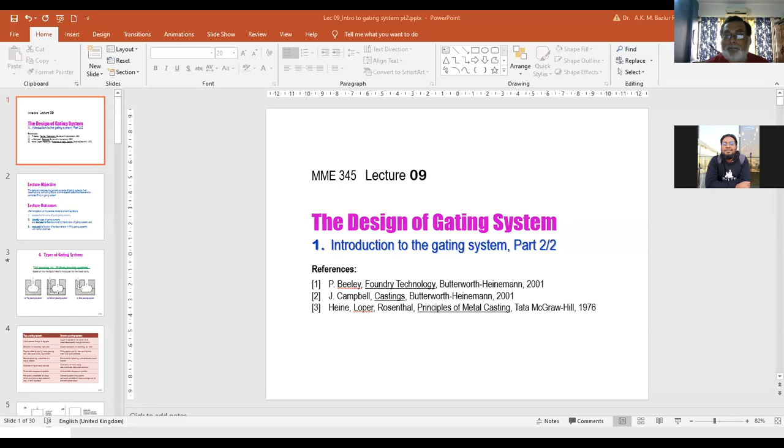Okay, we are continuing our pursuit to design of gating system. Last class, we introduced the gating system - what is it, how it works, what are the common features of the gating system, and what are the components of the gating system. In this class, we will end our introduction about the gating system. Here we'll talk about identifying different types of gating systems, and we'll analyze the factors controlling the function of the gating systems. So when you design a gating system, what are the aspects that we keep in mind during the design? And one special topic is for narrow channels.

If the casting section thickness is very thin, then one important element is surface tension, which comes into effect and controls the flow of the liquid metal. So how we deal with this narrow section casting during design of a gating system - that is our last aspect of today's class.

So let's talk about types of gating systems. In general, there are two different types of gating system. One is called top pouring and one is called bottom pouring. We are keeping in mind that it is solely based on how the liquid metal is introduced into the mold cavity.

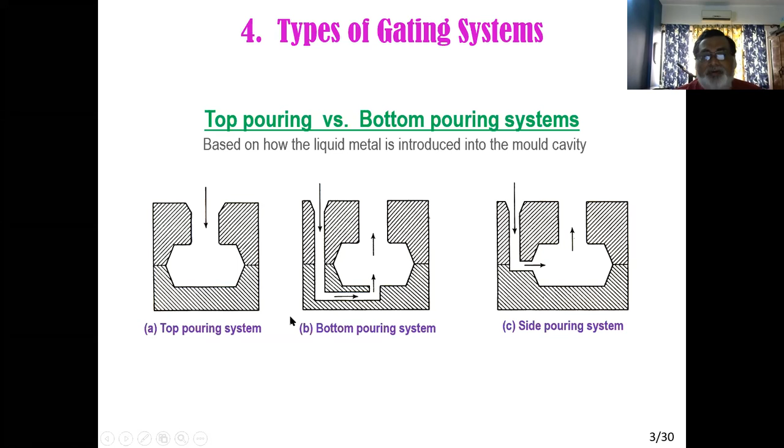On the other hand, if you have to design a bottom gating system, there is a lot of complexity, which we'll see later. So design of bottom gating system is a bit critical, and yield percentage is low. Pouring is aided by gravity, so faster pouring rate and less liquid fluidity requirement. We should mention this point because if you see the textbooks we are following, for example Heine's book, Beeley's books - all those books were written in the 70s, or even the 50s, 60s.

In that period of time, the only two metals commonly used were steels and cast irons. These types of alloys have low fluidity. So one purpose of casting was how quickly we can fill the mold cavity. Fluidity is an issue because steel solidifies very rapidly.

As a result, top pouring is always preferred, and all the gating systems used in textbooks show the top pouring system. On the other hand, in the bottom pouring system, filling is against gravity, so pouring is slow, and more fluid liquid is preferred because velocity is decreasing, so more time is needed to fill the mold cavity. So you need higher fluidity of the liquid metal.

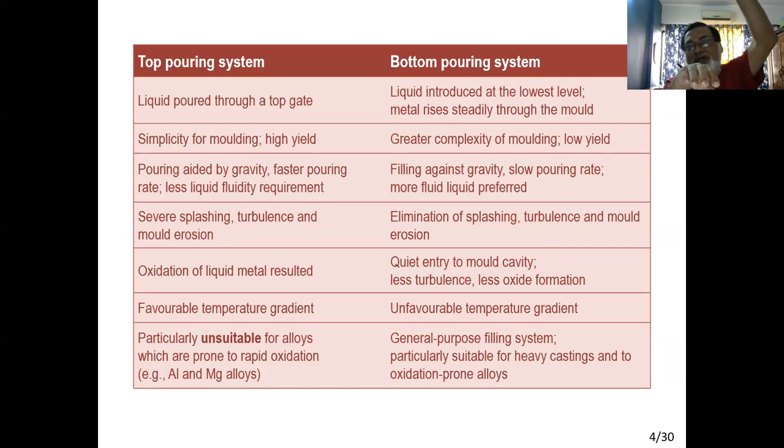On the other hand, if we pour from the bottom, the first liquid goes up and the last liquid stays at the bottom. So the last liquid is hotter but has less density, and the first liquid is colder with higher density. So the temperature gradient is not favorable this way - hotter liquid should be on top, colder liquid should be at the bottom.

So there is a motion of the liquid called convection, and because of this motion, certain things can happen - defects can generate, defects can mix up, oxide can flow and move, etc. So this results in an unfavorable temperature gradient in terms of solidification, and in terms of oxide or other defect movement.

This is particularly unsuitable for oxidation-prone alloys, for example aluminum alloy or magnesium alloy. If you cast using a top gating system for this type of alloy, turbulence will damage your casting. On the other hand, we prefer bottom pouring - we will advocate this type of pouring system in our design purpose. This is a general purpose filling system, and it is particularly suitable for oxidation-prone alloys. Aluminum and magnesium are excellent for the bottom pouring system, and it's also particularly suitable for heavy castings.

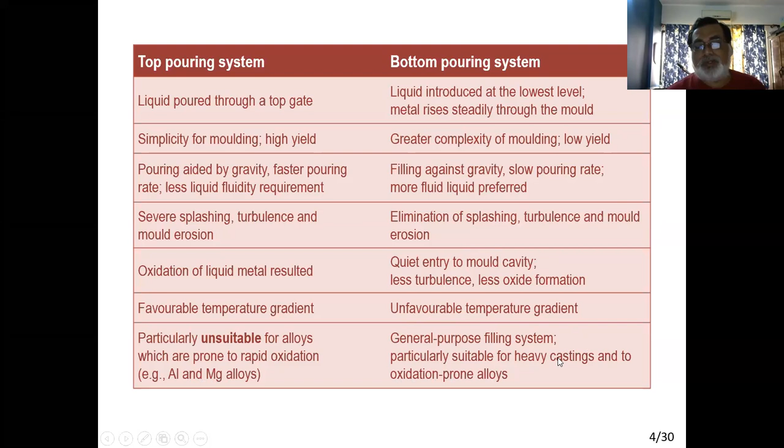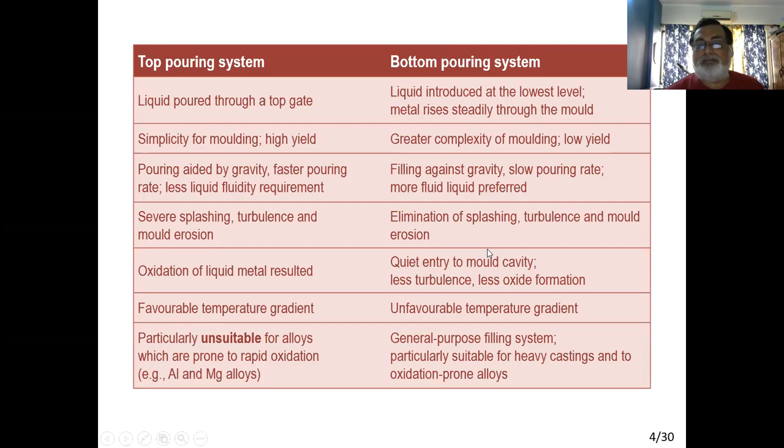Since heavy castings require more time to start solidification, during this time the unfavorable temperature gradient can be minimized. Because of convection, colder liquid can go down and hotter liquid can go up, and solidification doesn't start yet. So for heavy castings, this system is good for producing better quality casting.

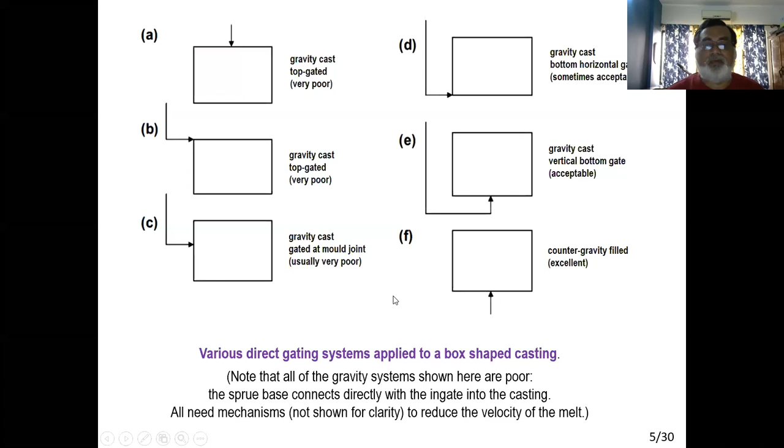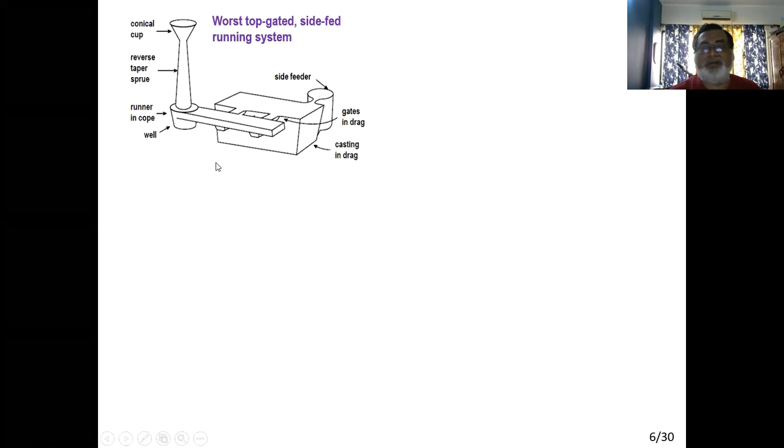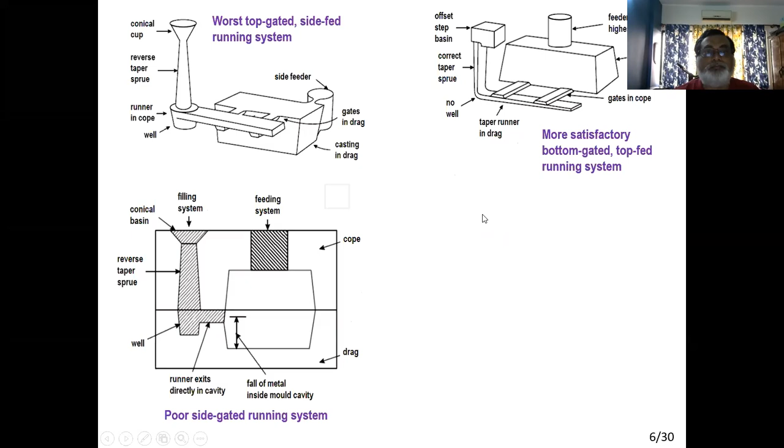This is a version of the bottom pouring systems where the channels are even more narrow. So instead of this one, here is a very narrow sprue. It could be rectangular or circular as well. And the runner is very slim, very thin, and the gates are also a small section.

As a result, the liquid metal requirement in the gating system is much less, so percent yield is increased. Ultimately, because of the constriction or narrowness of the channel, the liquid metal has very small opportunity for turbulence or splashing, because they simply don't have enough space to accommodate it. So this is one of the most effective gating systems, and we'll try to design these types of systems later on.

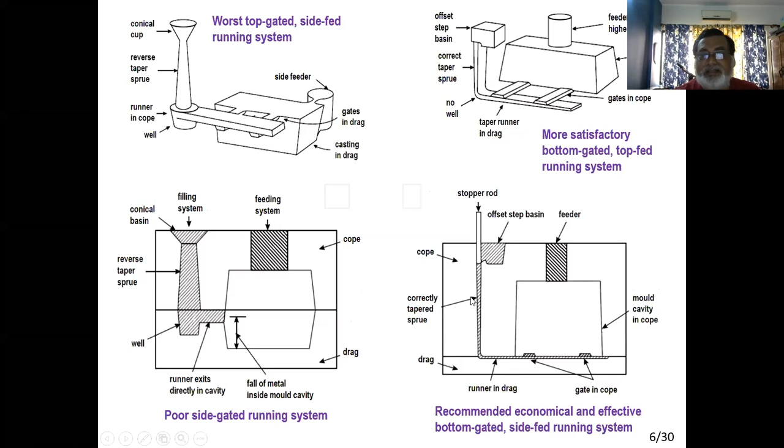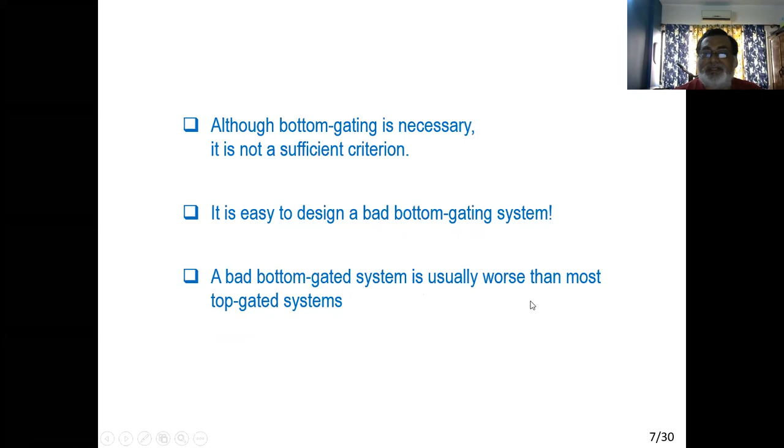So again, we are advocating bottom gating systems. Although the system is necessary, it is not a sufficient criteria, because designing a bottom system is very difficult. It is very easy to design a bad bottom gating system, and a bad bottom gating system is usually worse than most top gating systems. Let's see some examples.

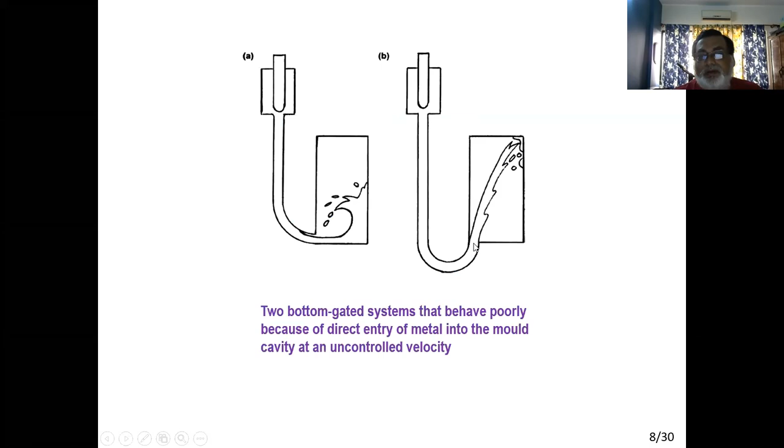This is a bottom gating system, but designed badly. Because of that, there is a lot of turbulence, a lot of splashing. The velocity of entry is very high. So although we are using a bottom pouring system, this is bad.

Similarly, this one is a bottom pouring system, but liquid metal enters the mold cavity directly. As a result, the velocity of the liquid metal after this high fall cannot be controlled. Liquid metal flows with very high velocity into the mold cavity, striking the opposite end of the mold cavity, damaging the other side, causing splashing and mold erosion. So although it is a bottom gating system, because of its design, it is very bad.

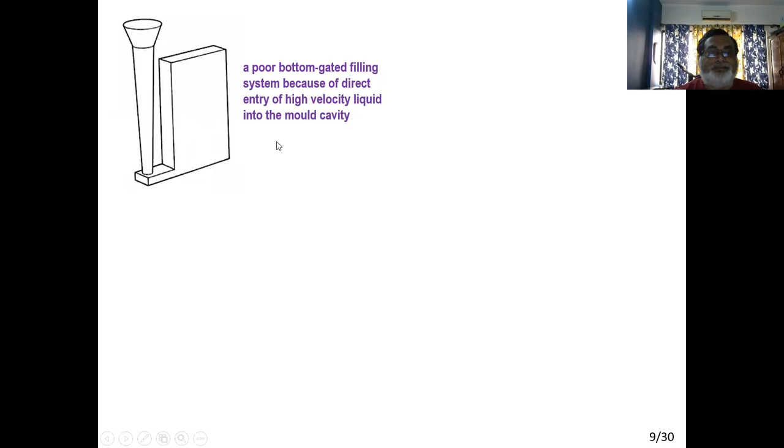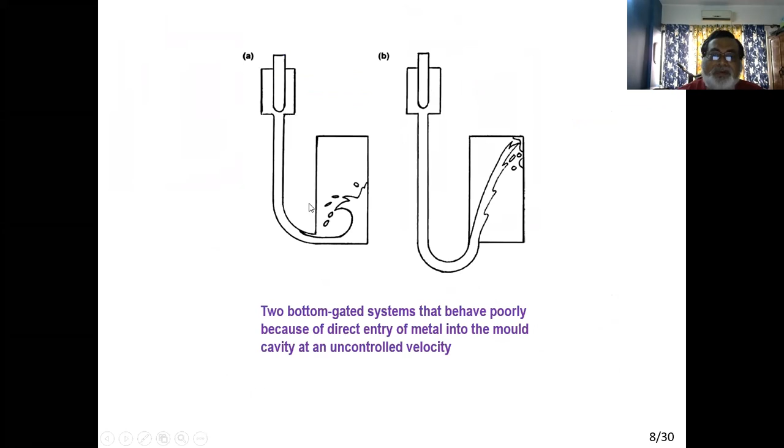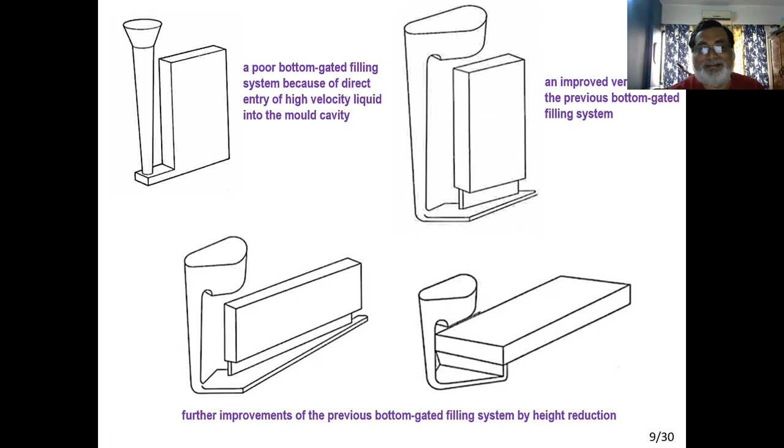Yes, sir, somewhat understood. Okay, we'll see later again there.

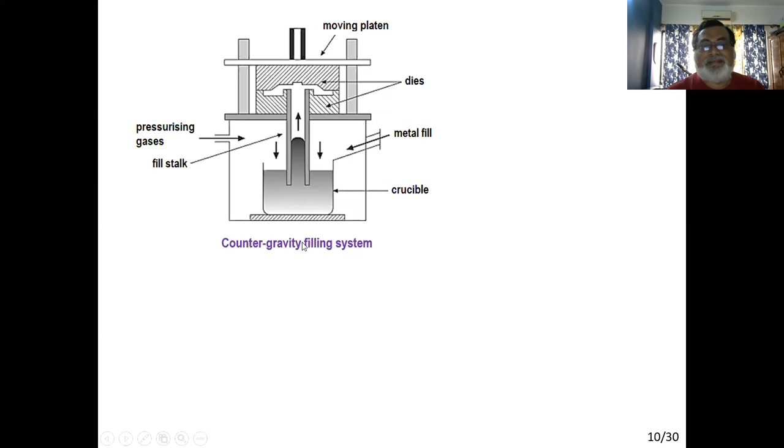Similar to this, there is another system, also a counter-gravity system, called the Cosworth process, invented by Professor Campbell. Here the furnace is open to the air. From the melting furnace, you pour the liquid metal into a chamber called the holding furnace, and there is an electromagnetic pump. Using this pump, you can flow the liquid metal through this channel or tube to the casting. Again, liquid metal is moving upwards under the action of the electromagnetic pump, so velocity is controlled, and liquid metal moves in a controlled way into the mold cavity. So again, there is no turbulence, and casting will be of supreme quality. This is called the counter gravity filling system. Obviously this is an expensive process, so if you need very good quality casting with defects minimized or even eliminated, you can use this type of casting. Obviously these castings are not suitable for general purpose castings because of their expense.

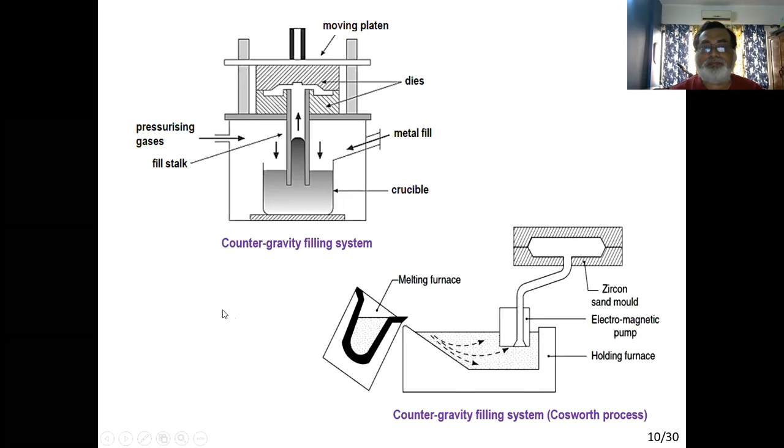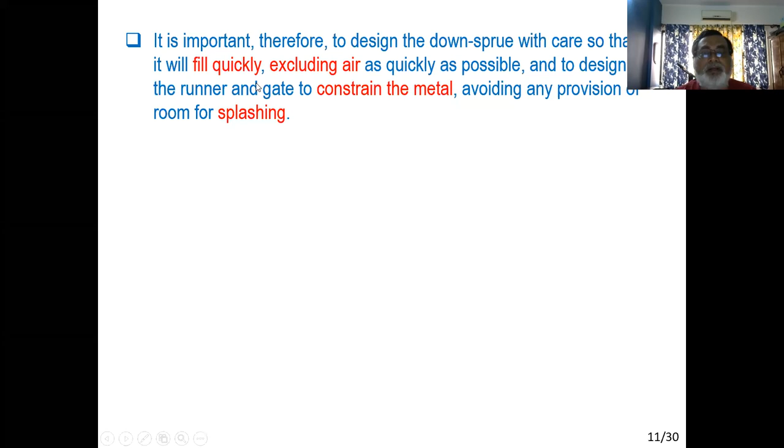So the purpose of the gating system is to have a sprue and fill the liquid metal through the sprue in such a way that it will be filled very quickly, so there will be no air, and so there will be no turbulence or gas entrapment. The sprue will be filled very quickly so that there is no air entry, and then we have a runner and gate. The liquid will be contained through this runner and gate, meaning there will be no chance of movement of the liquid metal through this narrow channel, so no splashing will be allowed. So we have a sprue whose purpose is to fill the liquid metal very quickly so there is no air inside the liquid. When the liquid metal enters the horizontal channel, which is the runner, it cannot move because of the narrowness of the runner and the gate. There will be no splashing, no turbulence, no vena contracta, so there will be no negative pressure zone that allows air to enter the mold cavity. That is the main aim of designing the gating system.

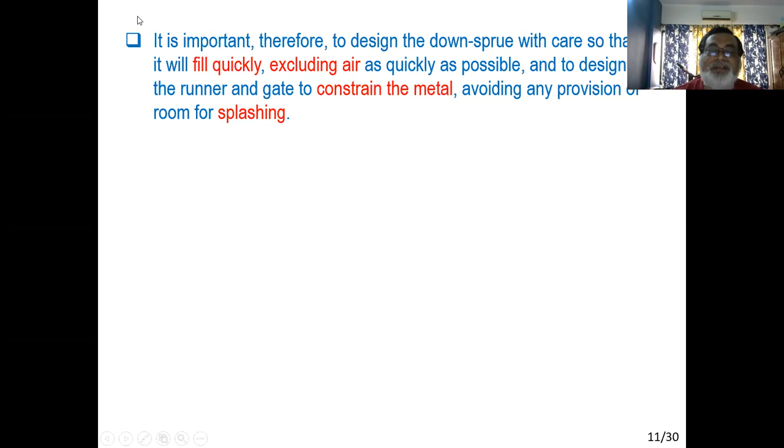As we prefer a bottom gated system, the base of the sprue should be the lowest point of the whole gating system. Once the sprue bottom is attained by the liquid metal, there is only a chance for liquid metal to go up, so liquid metal is always moving upwards. As a result, velocity is decreasing continuously, and liquid metal is moving in a controlled and progressive way.

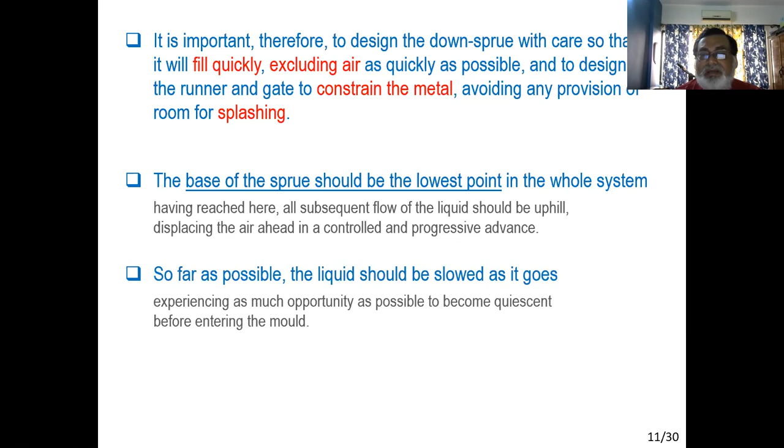So far as possible, the liquid should be slowed as it goes, so that velocity can be decreased and liquid metal enters the mold cavity in a quite calm manner. Our target is that the velocity of the liquid entering the mold cavity should be between 0.5 and 1 - this is the critical velocity. If we can maintain this velocity while the liquid metal enters the mold cavity, we are okay, and a good, reproducible casting will be generated.

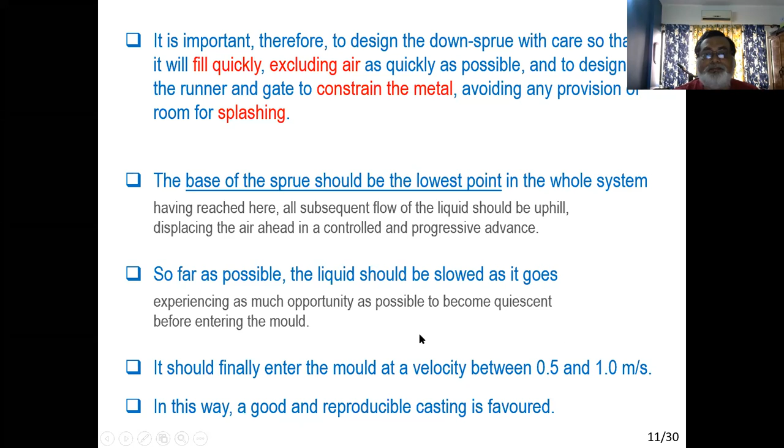So the top gating system and bottom gating system we concluded. Then there is another type of system called pressurized gating system and unpressurized gating system. What is a pressurized gating system? During this system, from the bottom of the sprue, liquid metal is moving and the channel of liquid movement is constricted gradually - the area of the channel is reduced, and because of that, the velocity of the liquid metal is continuously increased. At the same time, liquid metal is experiencing a certain back pressure.

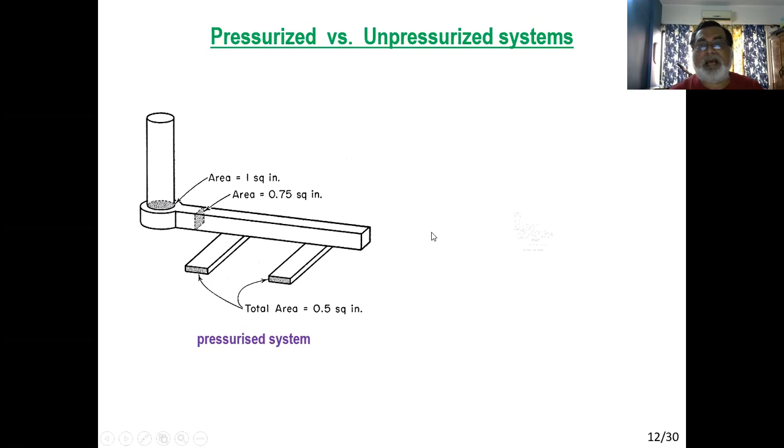In the unpressurized system, it's exactly the opposite. The bottom gate area, the sprue area, is the smallest area, and from there on, the area is expanding. As the area is expanding, the velocity is decreasing, and as the velocity decreases, the chance of turbulence is minimized. This is the sole purpose of this system - minimizing turbulence. Although there are a lot of disadvantages of this system, the purpose is to minimize turbulence.

But if we increase the area, there is no back pressure of the liquid. As a result, there is a chance of entering air into the running system because of not filling the running system completely by the liquid metal. So there will always be a chance for incomplete filling of the running system in this type of gating system.

So again, if we compare, in the pressurized system, the gate is used as a choke. What is a choke? Choke is the smallest area of the running system, and this is the point where the velocity of the liquid metal is calculated - this is the reference point. So the smallest area of the gating system is known as the choke.

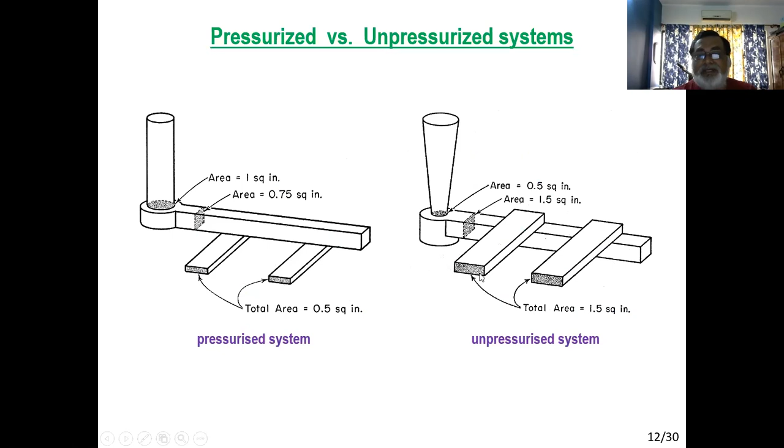Velocity in each multi-gate system is equal. So here we have used 2 gates and velocity in these 2 gates is equal. But here it is different, it will be different. And to maintain same velocity in these 2 gates, or if we use 3 or 4 gates, maintaining equal velocity in all gates is a challenge, and you need special measures to do that.

Volume of the gating system is smaller because we are decreasing the channel, so volume is smaller, so casting yield is very high. On the other hand, here we are expanding the gating system, so it has a chunky size, and yield of casting will always be lower. But because of the turbulence, we use this type of system in our design.

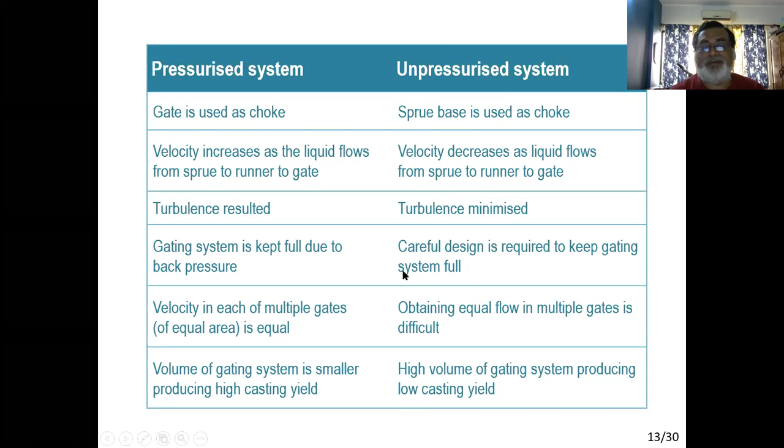Now we are saying a lot of bad things about pressurized systems. What are the bad things? Because turbulence is the main point. Nowadays, we see that most defects originate from turbulence, so we are very cautious about how to minimize the turbulence. And because of that, we say pressurized system is bad because turbulence is increased due to high velocity.

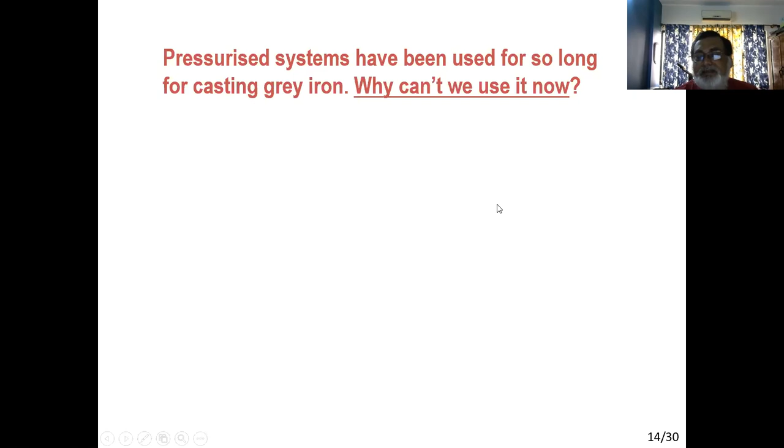But this pressurized system has been used for so long for casting gray iron or casting steel. Again, in our textbooks, these types of systems are used. So why can't we use it now? What are the problems of using this type of system nowadays?

Okay, first of all, this is because of the green sand system. In your lab classes, you use green sand system, that means sand-clay system. Bonding is done by the clay and water.

When you use cast iron, gray cast iron has a special relation with green sand. What is the relation? Oxidizing environment in green sand mold produces a liquid silicate film on the surface of the liquid iron, and this silicate film protects the liquid metal. And since it is liquid, there is no solid oxide film commonly found in aluminum or other alloys. Because of that, turbulence is not a problem for this type of system.

Gray iron with green sand system, turbulence is not much of a problem, and we tend to get good quality casting even when velocity is very high.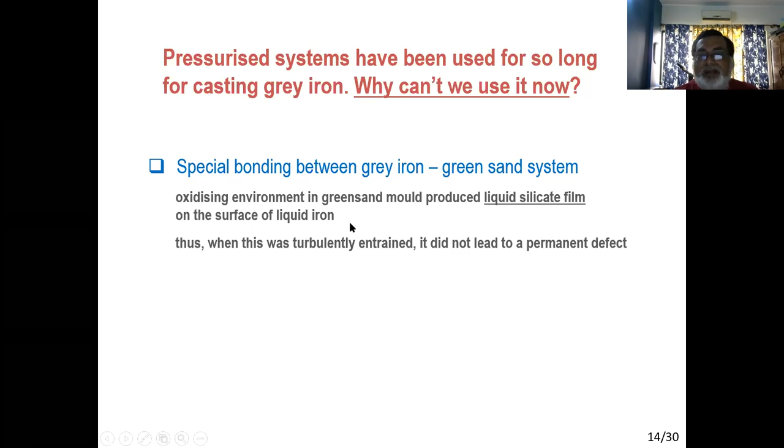But the problem is, nowadays we no longer use green sand system. To have quality casting, we use chemical binders and lots of mold additives. And these types of additives and chemical binders are not suitable, or are not doing much help that we usually found in the green sand system.

So sensitivity to turbulence is increased in this case. As a result, turbulence will give bad quality castings in these types of molds. Another thing is the use of oxidizing alloying elements such as magnesium or chromium, so turbulence is a bigger concern in this type of alloy.

Lastly, rise in the level of standards required of castings. Nowadays we have very restricted standards. Previously, for example, if a 1 millimeter size of defect was allowed, nowadays we cannot. Tolerated size of defects is reduced further, so nowadays, for example, we cannot tolerate more than 0.5 millimeter.

So because of the restriction in standards, we no longer accept such degree of turbulence in our casting. As a result, pressurized system is considered bad nowadays.

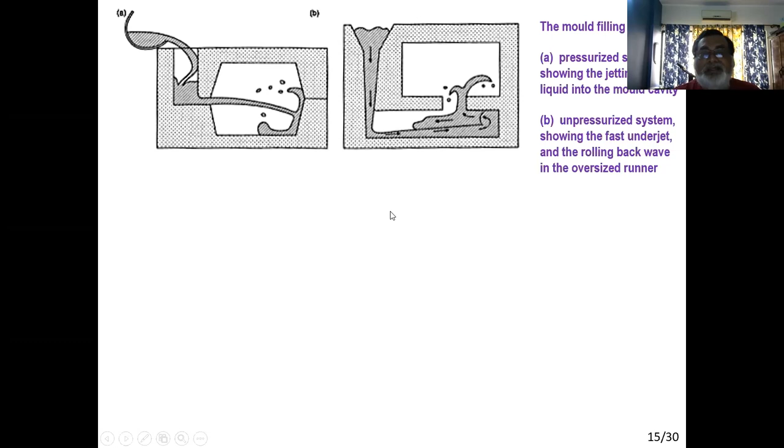There is another example.

So this is the sprue. It's a thin sprue base, and it is a runner. Liquid metal is flowing, hits the far end wall, rolls back, and then goes up into the mold cavity. There is a fountaining effect, not much, and then it rolls back again and starts filling the mold cavity.

So in design, even the bottom pouring system or unpressurized system, designing of the system is very critical. It will give you better quality casting, but designing is very crucial.

There is another process, naturally pressurized system. So we have pressurized system, we have unpressurized system, and then we have naturally pressurized system. Probably from next year I tend to advocate naturally pressurized system, but up to this year we have used unpressurized system. So what is a naturally pressurized system?

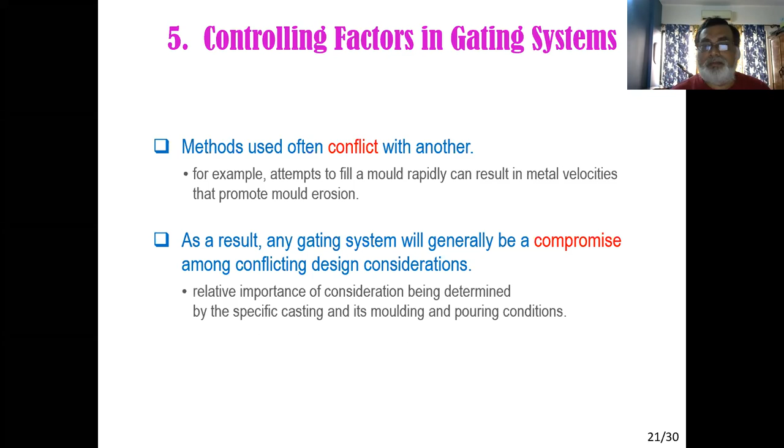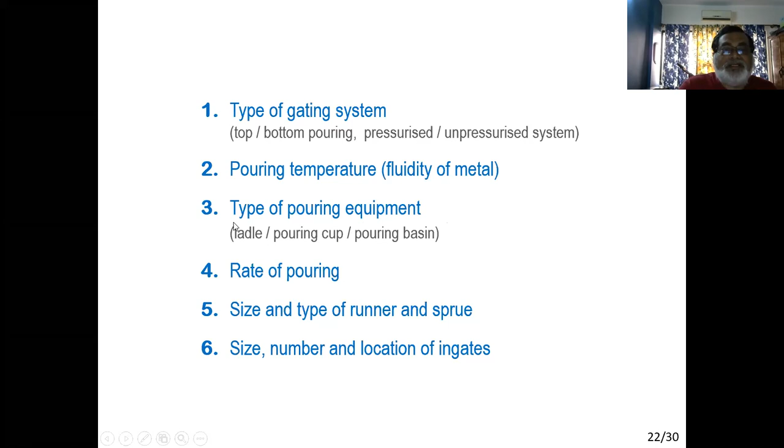Type of the pouring equipment, or at what point we are pouring the liquid metal and which equipment we are using, whether it is a ladle, or we are pouring directly from the ladle to the mold cavity, or we are using a pouring cup, conical pouring cup, or we are using a pouring basin. All these are different. We will see later.

The rate of pouring is also a critical factor because it will govern the velocity. Size and type of the runner - in fact, this will control the whole gating system. We will design the gating system based on a particular pouring rate. Size and type of the runner and sprue, size, number, and location of ingates. So while designing, we'll firstly consider this thing, then we'll design this one and these two based on this four.

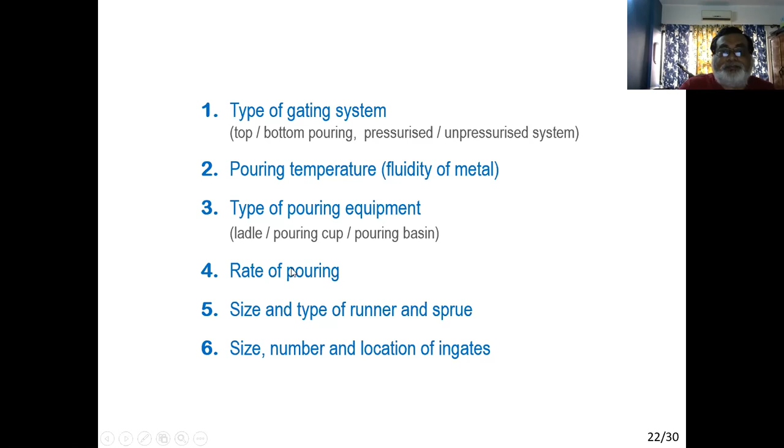Okay, let's have a 5 minute break. Any question on this so far we talked about?

Sir, I had a question. So in the X-ray image, when the bad design of the bottom pouring system led to the fountaining effect, you showed that there were cracks that showed up. So are those cracks solely created because of the oxide films, or are there any other reasons?

Okay, we are talking about this one. Yes, sir.

Later we'll see that most of the defects generated are because of this oxide film. And the defects usually are cracks, gas porosity, shrinkage cavity. So these are the common defects in a casting. And all defects can be initiated on top of an oxide film. So that's why turbulence is the critical issue here. If turbulence occurs, oxide can generate and enter into the liquid metal.

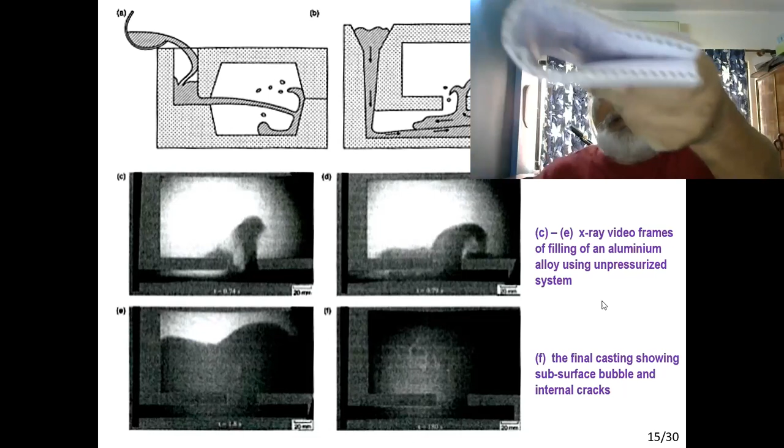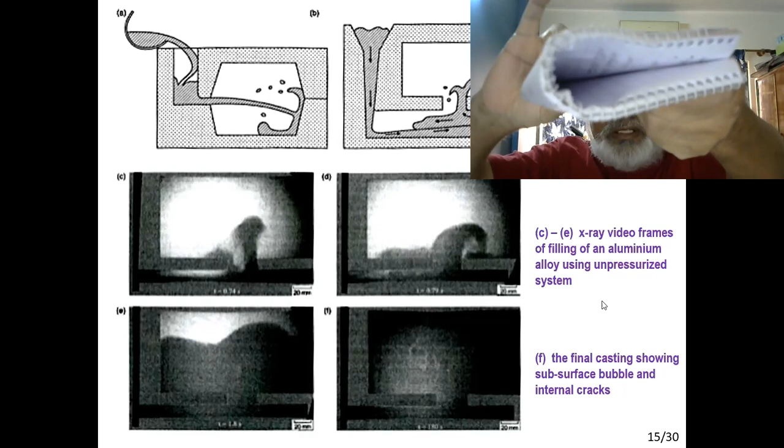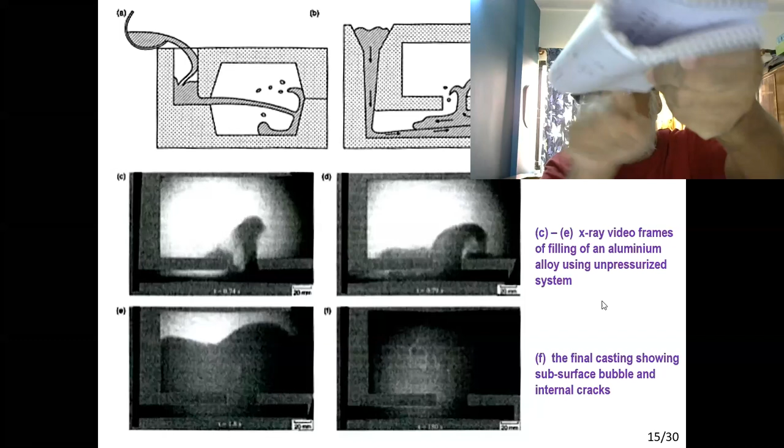যদি এরকম ফোল্ড হয়ে যায়, তার মানে উপরের পাশটাও অক্সাইড, পুরাটাই অক্সাইড। অক্সাইড ইজ নট ওয়েল্ডেবল, কারণ এর চারিদিকে লিকুইড মেটাল আছে, দে বন্ডেড ভেরি ইজিলি। এই পাশে বন্ড আছে, ওই পাশে বন্ড আছে, সবকিছু ঠিক আছে, কিন্তু মাঝখানে যে জায়গায় দুইটা অক্সাইড লেয়ার মিশলো, সেখানে কখনোই বন্ড ফর্ম করবে না, কারণ তারা ড্রাই। উপরের লিকুইডের সাথে বন্ড আছে, নিচের সারফেসেও বন্ড আছে, চারিদিকে বন্ড আছে, কিন্তু ভিতরে কোনো বন্ড নেই। as a result, this will act as a crack inside the liquid metal.

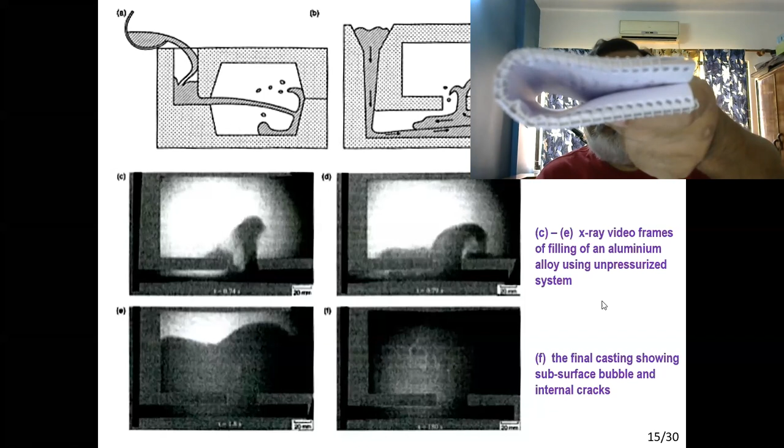So অক্সাইড যখন ফোল্ড হয়ে যায়, এই ফোল্ড জিনিসটাই একটা ক্র্যাক হিসেবে কাজ করে। জাস্ট ইমাজিন গ্রে কাস্ট আয়রন, তোমরা গ্রে কাস্ট আয়রনের ম্যাক্রো স্ট্রাকচার দেখেছো? Yes দেখেছি। গ্রাফাইট ফ্লেক্স, যেটা গ্রে কাস্ট আয়রনের মধ্যে থাকে, তাই না?

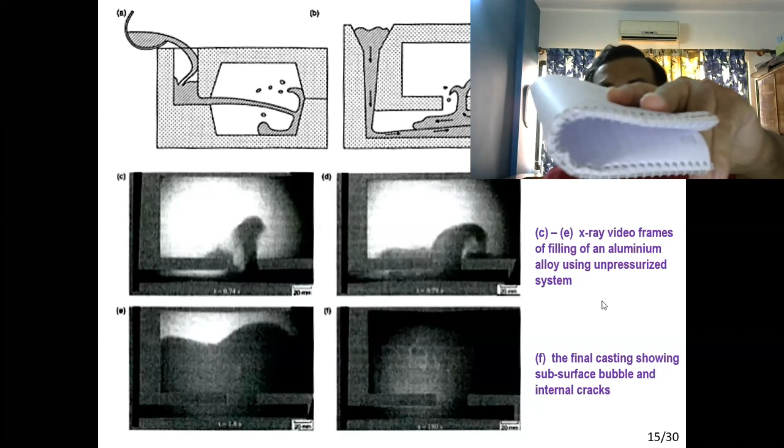গ্রাফাইট ফ্লেক্স থাকে, মানে এর ভিতরে পাউডার থাকে, এই পাউডার থাকার কারণে এর মধ্যে কোনো বন্ড নাই, যার কারণে সেটা ডিফেক্ট হিসেবে কাজ করে। এক্স্যাক্টলি সেম, এটাও একটা ডিফেক্ট হিসেবে কাজ করে, কারণ এখানে কোনো বন্ড নাই। সো ইট অ্যাক্ট অ্যাজ এ ক্র্যাক।

এর চারিদিকে ও উপরে আছে অক্সাইড, এবং এই অক্সাইড থাকার কারণে, আমরা সলিডিফিকেশন পড়ার সময় বলেছিলাম, অক্সাইড is responsible for nucleating gas porosity। So এখানে সে গ্যাস পরোসিটিও নিউক্লিয়েট করে।

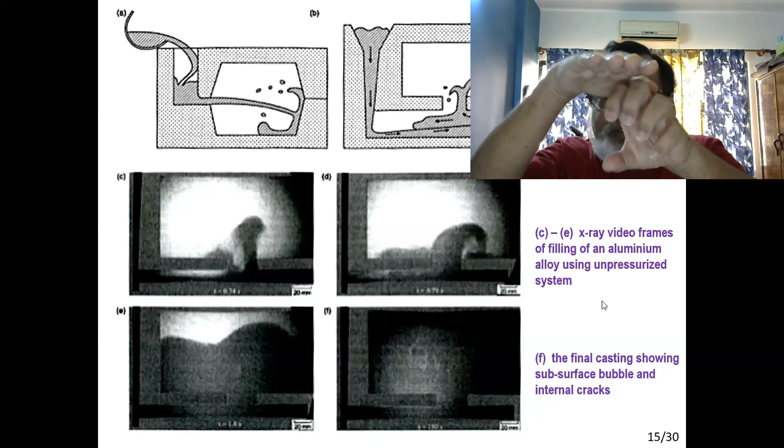আরেকটা ডিফেক্ট আছে, শ্রিঙ্কেজ ক্যাভিটি। যখন লিকুইড মেটাল পুরোপুরি ভরা থাকে, তখন এর ভিতরে ক্যাভিটি জেনারেট করে। কেন করে? কারণ এখানে একটা টেনশন কাজ করছে, লিকুইড মেটাল শ্রিঙ্ক করছে সলিডিফিকেশন শ্রিঙ্কেজের কারণে, কিন্তু মোল্ডের ভিতরে সে রেস্ট্রিক্টেড থাকে। মোল্ডের সারফেসের সাথে সে লেগে আছে, কিন্তু ভিতরে শ্রিঙ্ক করতেছে, যার কারণে ভিতরে একটা নেগেটিভ প্রেসার তৈরি হয়। উপরে সারফেস টেনে ধরে আছে, কিন্তু সে শ্রিঙ্ক করতে চাচ্ছে, সো একটা টেনসাইল ফোর্স কাজ করে, এবং এই টেনসাইল ফোর্সের কারণে ক্র্যাক জেনারেট করে।

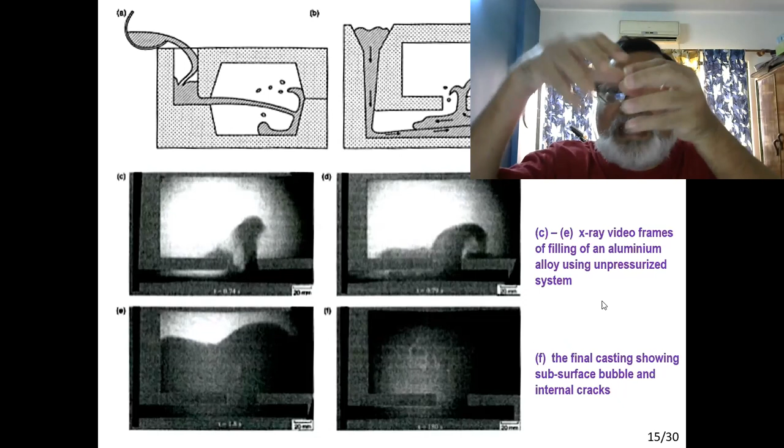যদি এর ভিতরে কোনো অক্সাইড ফিল্ম থাকে, তাহলে ভেরি ইজিলি ক্র্যাক জেনারেট হতে পারে। যার ফলে আমরা যখনই কোনো শ্রিঙ্কেজ ক্যাভিটি ক্লোজলি অবজার্ভ করি, আমরা দেখি যে ইট অলওয়েজ অরিজিনেটস ফ্রম এ ক্র্যাক অর এ অক্সাইড ফিল্ম। সো অক্সাইড ফিল্ম নিজেই ব্যাড, কারণ এটা ক্র্যাক হিসেবে কাজ করে। এছাড়াও এই অক্সাইড ফিল্মের উপরে গ্যাস পরোসিটি নিউক্লিয়েট করতে পারে।

এই অক্সাইড ফিল্মের উপরে shrinkage cavity increase করতে পারে। So these are the three common defects in casting, or three main defects in the casting. Other defects এর ভিতরে sand particle আছে, inclusions আছে, there's some different minor things। These are the three main defects.

তারপরে আমরা আরেকটা ডিফেক্ট নিয়ে কথা বলবো, হট টিয়ার, লিকুইড অবস্থায় টিয়ার করা। এই সব কিছু ক্যান জেনারেট অন টপ অফ অক্সাইড ফিল্ম। That's why we are saying that turbulence is so important.

এখানে যদিও লেখা নাই লিকুইড অ্যালয়টা কি, কিন্তু আমরা জানি যেহেতু প্রফেসর ক্যাম্বেল অ্যালুমিনিয়াম নিয়ে কাজ করে বেশি, সো বেসিক্যালি ইট শুড বি অ্যান অ্যালুমিনিয়াম কাস্টিং। এবং অ্যালুমিনিয়াম কাস্টিং এর মধ্যে অক্সিডেশন হওয়া ভেরি ইজি।

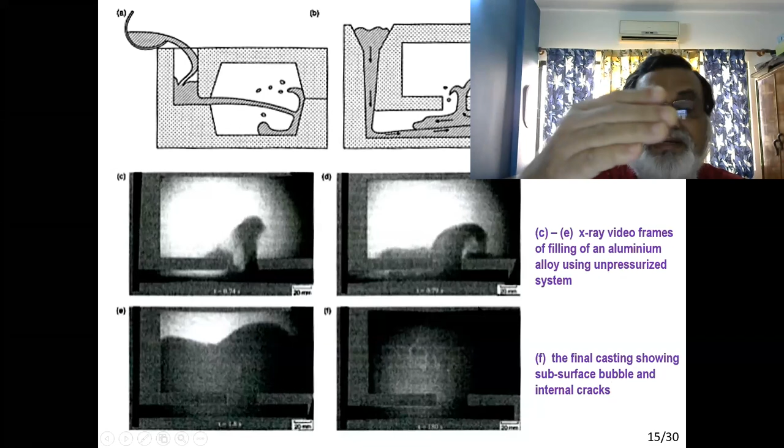যার কারণে আমরা এক্সপেক্ট করতেছি বিকজ অফ দ্য টার্বুলেন্স, অক্সাইড ফিল্মের ভিতরে মিক্স আপ হয়ে গেছে, এবং এই অক্সাইড ফিল্মের মধ্যেই ক্র্যাক এবং গ্যাস বাবল ক্রিয়েট করেছে। সেখানে বলা হয়েছে, the final casting showing subsurface bubble and internal crack, যেহেতু চারিদিকে সলিডিফাই হয়ে গেছে, সারফেস টু সারফেস পুরোটা সলিডিফাই হয়ে গেছে, সো ভিতরে যে গ্যাস বাবল আছে সেটা সারফেসে বেরিয়ে যেতে চান্স পায় নাই, তো ভিতরে বাবল হিসেবে থেকে গেছে এবং কিছু ক্র্যাকও আছে।

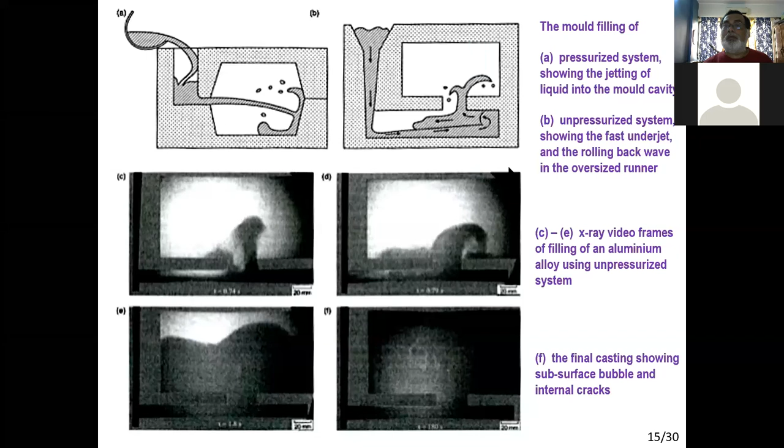So our next topic is surface tension controlled filling in gating system. We know about surface tension, and if the section thickness of the channel is very small, then surface tension force comes into effect, and because of this surface tension, liquid metal may not enter the mold cavity at all.

So if the section is too narrow, or if there is a curve or reduction in filling pressure resulted, the surface tension resistance can limit the liquid metal to enter into the mold cavity. So even in the worst case scenario, the mold can be emptied out because of this surface tension. So surface tension is a big issue in small section casting, or casting having a small section.

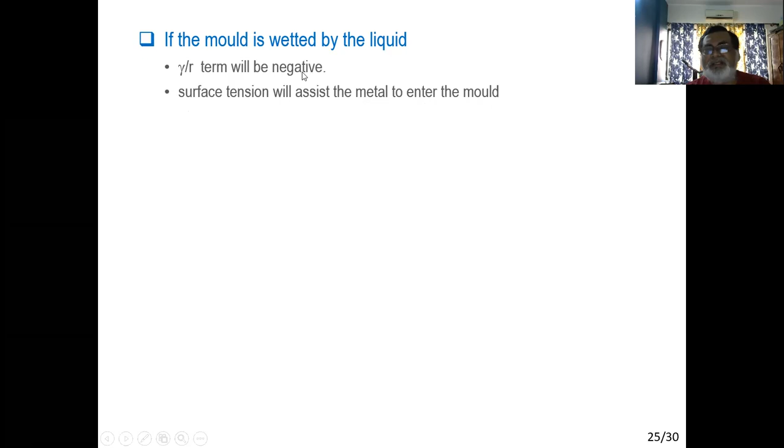So what is Pi? The positive pressure will be experienced by these two factors. One is atmospheric pressure, that means directly acting from the sprue, forcing the liquid through the sprue to enter into the mold cavity. And there is another one called metal head pressure, H rho G. Because of the height of the mold and the sprue, it will experience the metal head pressure. So metal head pressure and atmospheric pressure, these are the two positive components, or internal pressure, that aid the flow of liquid metal.

Resistance will be offered by two aspects. Here is Pa, which will be experienced through the mold because the mold is open to the atmosphere, so this Pa will be introduced into the mold cavity through the mold. At the same time there is a Pm, mold gas pressure. Firstly there is air into the empty mold cavity, so as liquid metal enters into the mold cavity, the air inside the chamber will offer resistance, not letting the liquid metal flow.

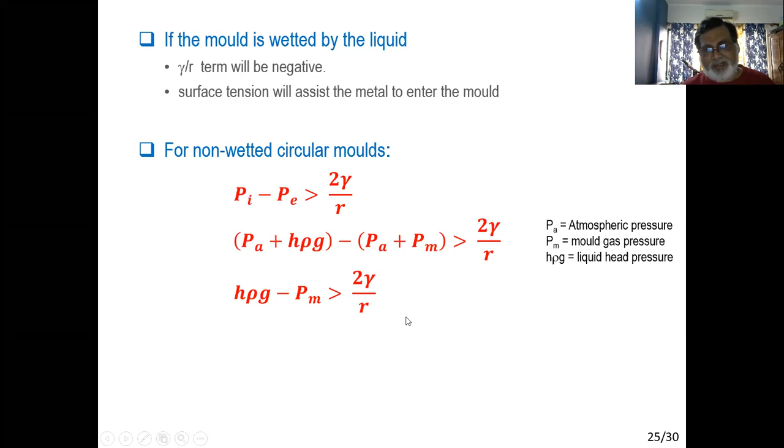Now let us consider these three aspects. Sometimes when the mold is prepared, they vent the mold using a small thin steel wire. What is the purpose of this venting? Is it good or bad? Does it affect the filling of the mold?

What happens during venting? If you vent the mold, the gases inside the mold can easily go out. As a result, this Pm becomes zero, so the minus term becomes zero, so the overall term becomes greater. As a result, liquid metal will have more opportunity to enter into the cavity. So venting helps filling of the mold - it is good for mold filling.

What about atmosphere? Does atmospheric pressure help at all? In the final equation, there is no term for atmospheric pressure - it cancels out from the positive and the negative. So the role of atmosphere is nothing, zero. There is no effect of atmospheric pressure in filling the mold cavity.

Does vacuum casting help? What is the meaning of vacuum casting? Vacuum casting means atmospheric pressure is reduced - atmospheric pressure 101 kPa can be minimized to 10 to the power minus 3, 10 to the power minus 5 kPa, etc. So basically it is Pa in a reduced value.

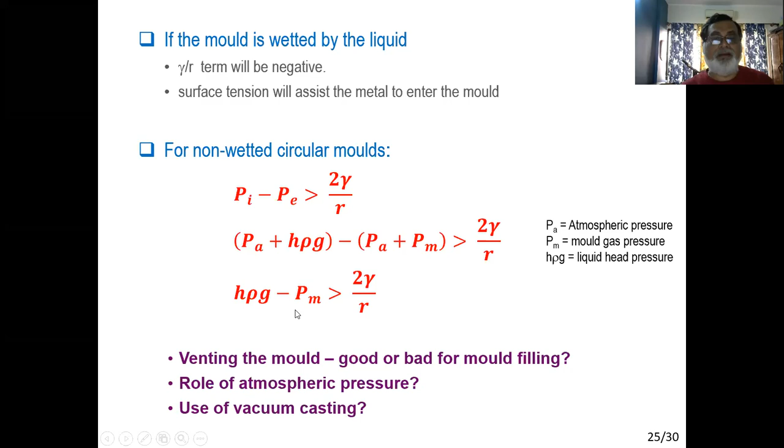Now for normal casting, using this formula and ignoring PM, the solely positive pressure is H rho G. So if we calculate H rho G for a 100 millimeter height casting, the value becomes 2.5 kPa. That means the positive pressure is 2.5 kPa, and this 2.5 kPa is forcing the liquid metal to enter into the mold cavity.

But to enter into the mold cavity for a 1 millimeter section, we need only 2 kPa resistance. So the liquid metal, moving at 2.5 kPa against 2 kPa resistance, can easily enter the section with 0.5 millimeter radius. On the other hand, to enter the trailing edge, which is only about 0.1 millimeter radius, the resistance is 10 kPa, but we're only forcing the liquid metal using 2.5 kPa. So the liquid metal cannot enter into these sharp points, resulting in a defect in this area. It will just bend here and we will have incomplete castings, so the trailing edge has no chance of filling.

But if we use vacuum assisted filling, using this formula, H rho G is 2.5 and PA is equal to 100, so the total becomes 102.5. Actually, since we're using 101, anyway this is 102 or 103.5, whatever it may be. So the resistance is 10 kPa, but we're forcing the liquid using more than 100 kPa, so the liquid metal can easily enter into the trailing edge.

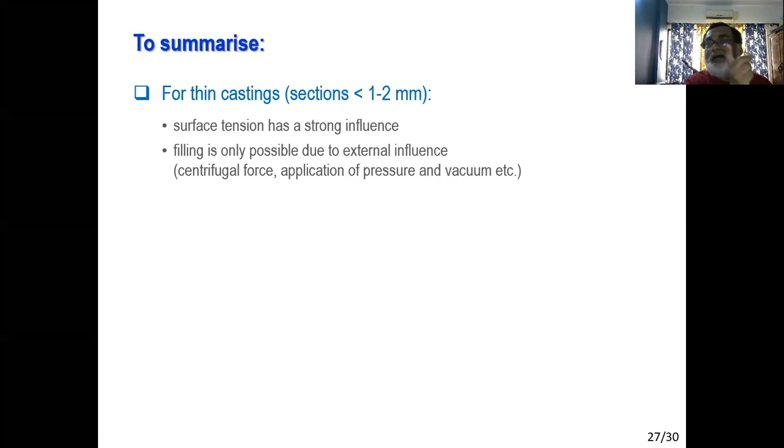Later we'll see there's a casting process commonly called centrifugal casting, where velocity is used to centrifuge the liquid metal into the mold cavity. Because of this high velocity and high centrifugal force, liquid metal can enter into the mold cavity. So this type of external force is needed to enter into molds having small sections, meaning the metal head required to force the liquid metal into a small section, ignoring atmospheric pressure.

So H rho G is equal to twice gamma by R, so H is equal to twice gamma by rho G R. So if the section is half, if you reduce the section by 2, head will be doubled. You need double head, so sprue height will be doubled. On the other hand, if the section becomes circular, again the head will be doubled. So we have to keep in mind these two aspects during designing the mold, designing the running system.

Sir, how does the section being circular make the head double again? Okay, in that case, you have to use the general common formula. So if it is not circular, we have two radii. If it's circular, we have twice radius because the two are equal.

Sir, does that mean that for the thin section, we are assuming the other radius is not being taken into account, pushed to infinity? Yes. Then what, one term becomes infinity. So what does that physically mean? This means zero, if it is a plate.

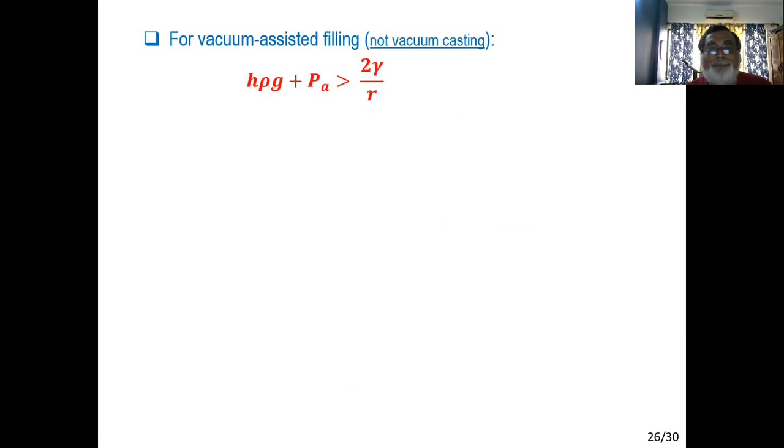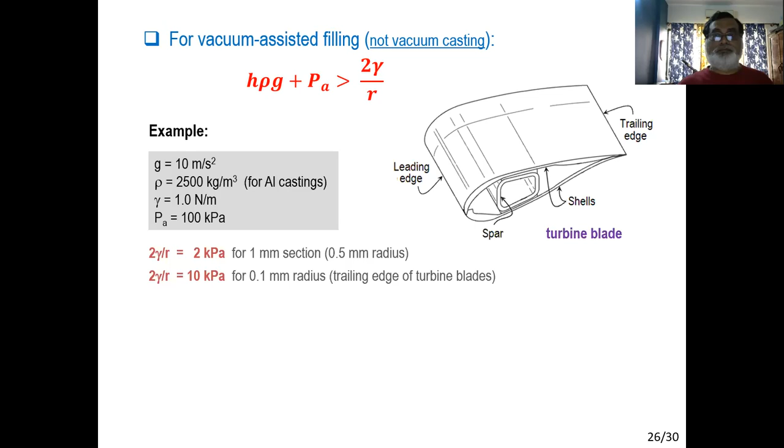Okay, probably sir, I am missing something. As far as I know, for a cylinder, if we consider two principal radii of curvature, one can be said infinity, that is flat, and the other is zero. For a plate however, there are two mutually perpendicular directions, both are flat. No, no, no, not both are flat, okay.

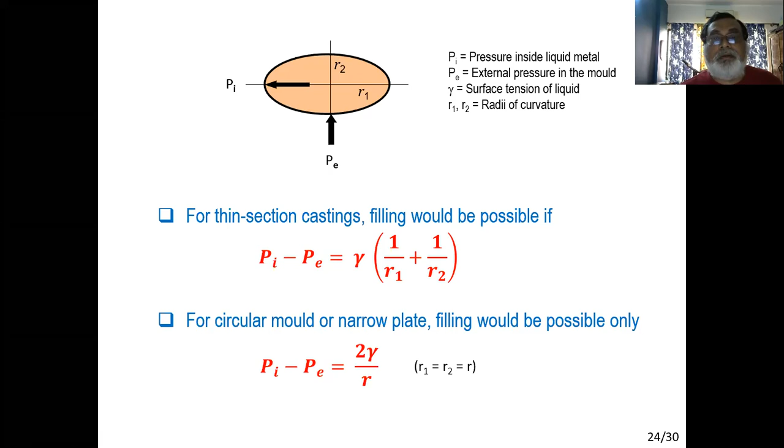Just consider this: if it is circular, we have R1 and R2, and those two are equal, so we have a general R. Oh, okay sir, I think I have got it. We are considering the geometrical bend plus the bend of the liquid flow itself. Yes, okay, now I understood.

In short, if the section is thinner, surface tension will be experienced, and it will tend to prevent the liquid metal entering the mold. Because of that, we need external pressure to force the liquid metal into the mold cavity. Usually two ways this is done, one is called high pressure die casting, that means we are forcing the liquid metal into the mold. For example, if you want to reproduce a radius of 0.001 millimeter, that means thickness of the section is 0.001 millimeter, very small, very thin, and for that, pressure required is about 1 megapascal, that means 10 atmosphere.

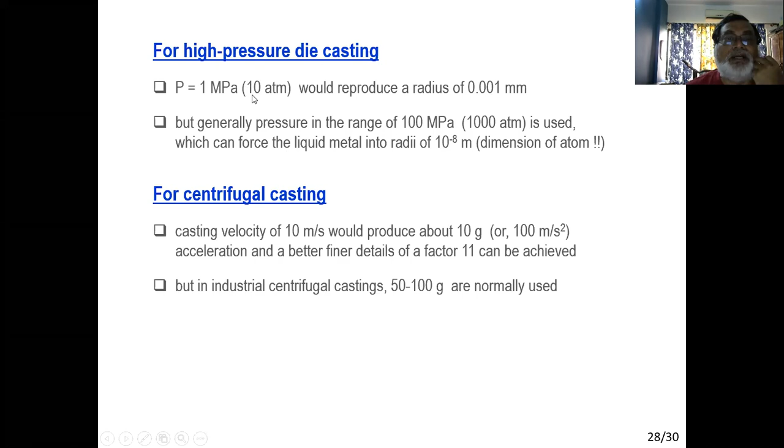So we can calculate it using the previous formula. But generally, for high pressure die casting, 100 megapascal is used. One megapascal is required, but practically 100 is used. And if we enter this 100 megapascal into our formula, the radius of the section becomes 10 to the power minus 8, which is the size of a radius, diameter of an atom. So can you understand what I'm saying? That if we use 100 megapascal pressure, we can force the liquid metal into a section having a radius of 10 to the power minus 8 meter, and this is the dimension of an atom.

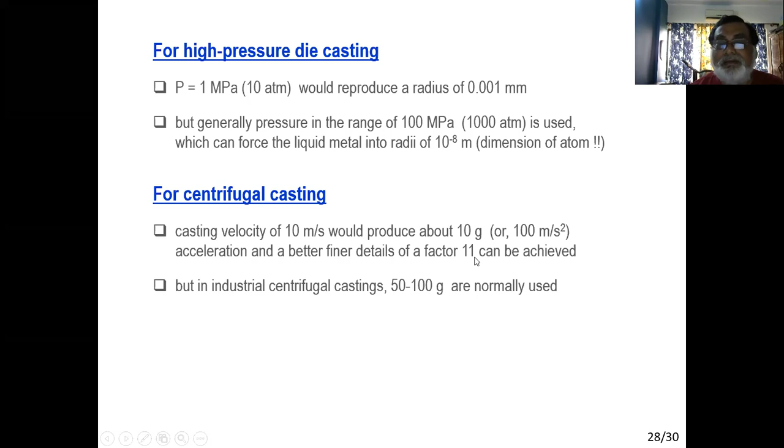So do we have any kind of casting that has this small a cross section? No, never. So why do we use this 100 megapascal high pressure in high pressure die casting? Second question: for centrifugal casting, if the casting velocity, that means this centrifugal force, is 10 meters per second, it will produce 10 G, that means 100 meters per second squared acceleration, and better, finer details of factor 11 can be added. This is more than enough to produce finer details of a casting. But in industry, we use 50 to 100 G, very high, where 10 G is enough to produce a surface finish of factor 11. So why are we using this high pressure or centrifugal force in industrial production processes? This is a question that usually appears in your exam.

Can you understand what I'm saying?

Only a small fraction of the pressure required is sufficient to produce good quality casting, but we use tremendous force to push liquid metal into the mold cavity. This has nothing to do with mold filling itself. The gating system fills the liquid metal into the mold cavity, so we are practically studying the filling system, but this high pressure has nothing to do with filling. This high pressure is used so that defects cannot be generated inside the mold. Later, while studying the feeding system, we will discuss this further. Because of this high pressure, defects cannot be generated inside the casting, and for that matter we use this high pressure. So this has nothing to do with filling the mold cavity.

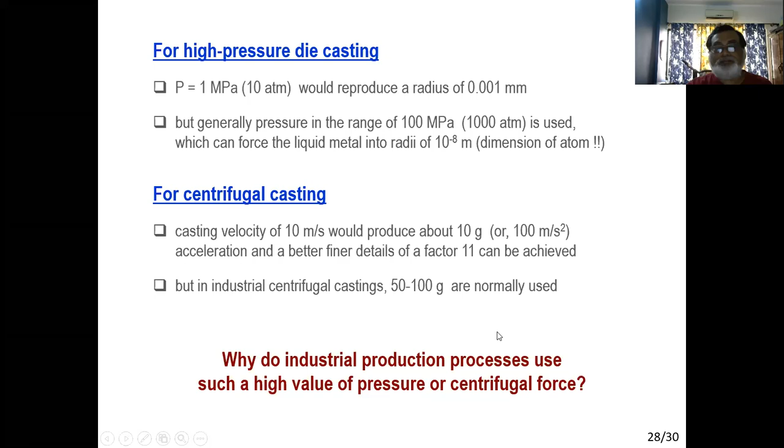Another important topic is surface finish. If the metal head pressure is very high, what happens? From our earlier equation, if the external pressure is very high, liquid metal can be forced to enter into the mold cavity. So if the total pressure is very high, liquid metal will not only enter the mold cavity but can enter into the spacing between the sands. As a result, the surface finish will be very bad. For sufficiently high metal head pressure, surface tension is no longer able to resist metal penetration, and casting with rough surface will result. This is not wanted at all.

We tend to do something so that this kind of thing never happens. To resist metal penetration, according to the formula, we can reduce the R value. That means we can increase the right hand side term, gamma by R. As gamma is constant for a particular liquid metal, we can reduce R so that the right hand side term becomes much higher. How can we reduce this term?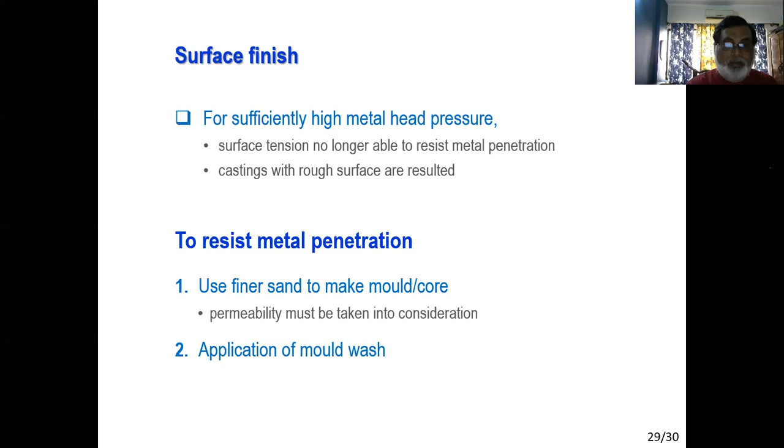Today's lecture includes the final part of designing the gating system, an introduction to the gating system. There are two aspects of the gating system we should consider while designing: one is top pouring system or bottom pouring system.

Obviously, the top pouring system would introduce lots of turbulence inside the mold cavity, and as a result the casting can be damaged. On the other hand, the bottom pouring system has the capacity to reduce metal velocity as liquid metal enters from the bottom and goes up against gravity. So it has a greater opportunity to reduce liquid pressure and reduce turbulence, and as a result casting quality can be enhanced. So we will use the bottom pouring system during our design.

Then there is another system called the pressurized system or unpressurized system. In the pressurized system, the area of the running system is continuously decreasing, meaning from the sprue to runner to gate, the area decreases. As a result, the velocity of the liquid is continuously increasing, and at the same time the liquid experiences a certain back pressure, so that it comes back and fills the running system.